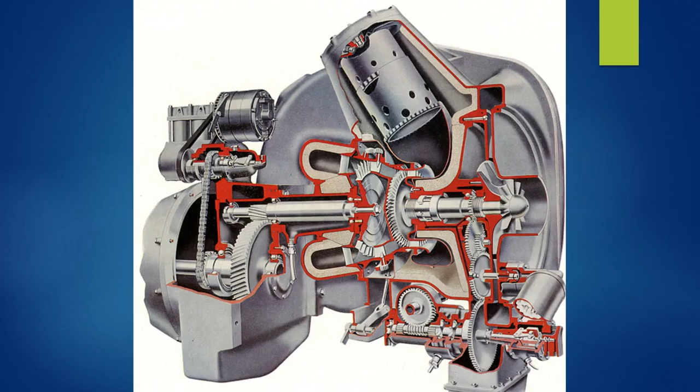Part 3: we never needed petroleum and never will. This is a big subject, sure to raise controversy. We didn't need petroleum in order to have electrified cities and factories, cars, ships, and flying machines. That's why I'm saying we never needed petroleum. I'm not saying we could have been farmers for the rest of our years here on this planet. We could have still had all the things that we have now. That's what I'm going to show.

The number one reason: the abundance of coal. Now I'm not advocating going back to the coal days. What I am explaining is that we never needed to go from coal to petroleum.

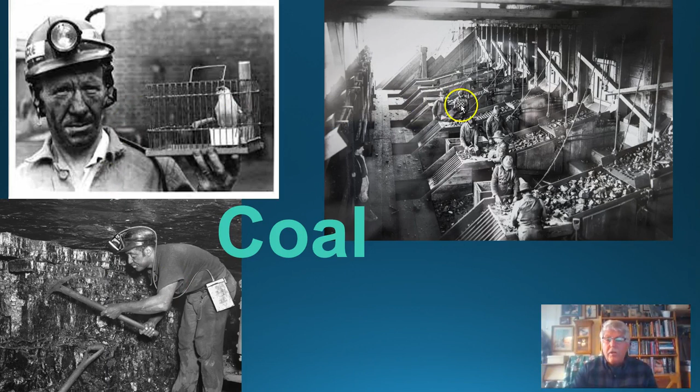These workers put in their time, some real men. I have nothing but respect for these coal miners, and these guys have done their time. I don't want to go back to having this kind of a solution to our current energy dilemma.

What I'm saying is that the process of going from coal to crude oil represented no gain in technology. In fact, removing electricity from our tracks and roads moved us backwards in technology.

Coal is a very plentiful resource on this planet. The one advantage of using coal over petroleum is that you can use it basically as it is, scooped out of the ground. You don't need to process it other than to crush it up a little bit. You don't need to cook it, refine it, put it into different tanks, distill it, or have pipelines. That's why we didn't move forward when we went from coal to petroleum. If anything, we moved backwards.

Look what you can do with coal. You can make synthetic gas out of it, methanol, methyl acetate, and acetic anhydride. And from this you can make virtually every product that we need to manufacture from petroleum or crude oil today.

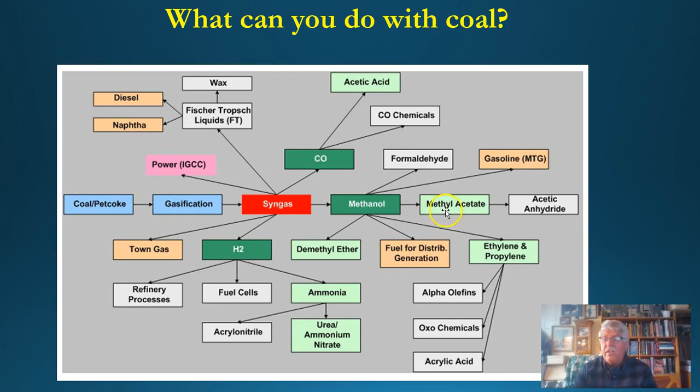We've got diesel and naphtha here. We've got gasoline coming off, first producing methanol and then converting that into gasoline. Boy, what a dumb idea that is, but hey, if you've got to have gasoline, that's one way to make it. But you can make everything from coal.

Now this, from 1910, is a steam generator. We've got a 2-stage steam turbine here and an electric generator here. This was invented as early as around 1884. But folks, understand, the day this was invented was the day it was lights out for crude-produced liquid crude oil, because this ran off steam.

And in order to make steam, all you need to do is boil water. And how do you boil water? With anything that'll burn. This provided a way to get energy anywhere on the planet by using copper wire to get it there, rather than trucking it or using pipelines.

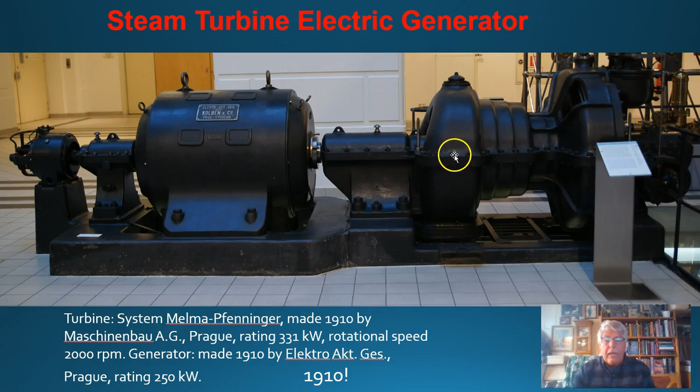Now imagine if today all of our highway system was an electrified grid, like it should be and like it was at one time in major cities in the United States and across Europe. We would be able to stop carrying fuel, stop filling up with fuel, stop polluting the downtown, get rid of service stations. We'd have no more tank farms, no more pipelines. That's a major improvement. That's a win for the environment.

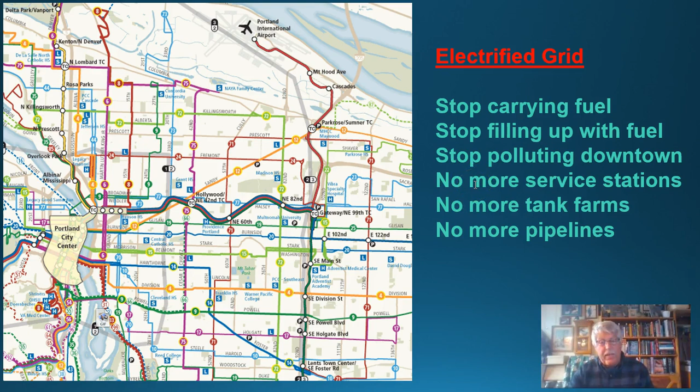Now let's go back even further, beyond coal, to simple biomass energy. Biomass is anything that will burn that's of a mass structure—a solid, like wood. It's the simplest form of agricultural energy use: the direct combustion of cellulosic crops or residues such as hay, straw, or corn fodder.

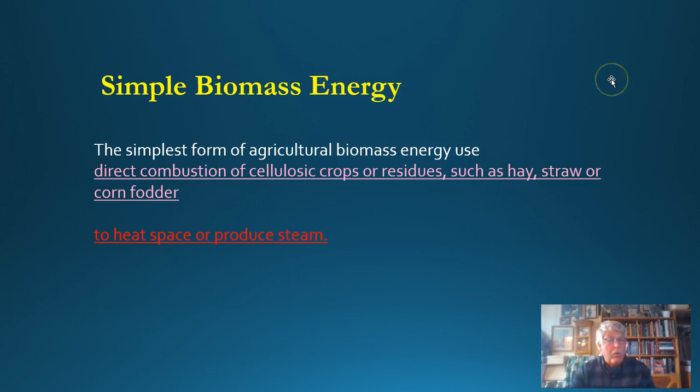And after all, we're just trying to produce steam. So the energy game is over. We've got to stop letting them tell us and make our lives worrisome because we think we're on this little thing, the crude oil curve, and whatever the price of crude oil is, that our prosperity goes up and down.

This is absolutely absurd. They've got the world consumption now up to 96 million barrels a day, and I calculated that out to where this is what they claim the world is using in petroleum: 2.8 million gallons a minute, 6,000 cubic feet a second. Okay, so how much flow is that?

I tried to find a pipeline. You need a 32-foot diameter pipeline at full flow, 24/7. And this is a 21-foot pipeline, the biggest one I could find. So it would be 1.5 times this size, which would be actually 2.2 times the surface area or size, flowing oil, worldwide demand, 24/7.

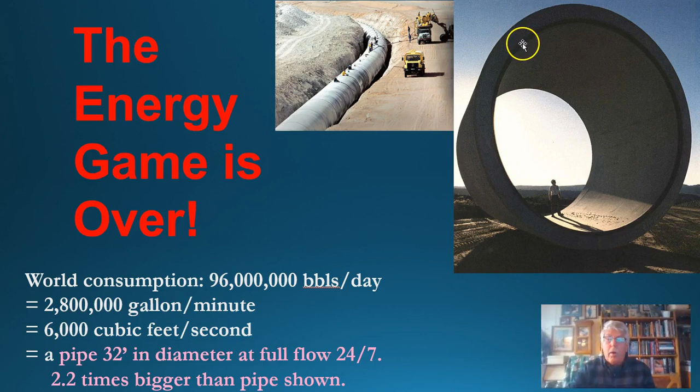This is utterly absurd. You know, they talk about global warming. Here it is, folks. If global warming is real, by the way, let's not go there.

One ton of coal, did you know, equals 188 gallons of oil? In 1912, when the Titanic was sunk, the commercial price of coal was only $1 per ton. So she could cross the ocean on 3,000 tons, and that meant hauling 3,000 passengers, each transported across the Atlantic in total comfort with steam baths and heated rooms and lobster and cappuccino and whatever you wanted. It only cost them $1 per person in energy costs. Now that is a great invention.

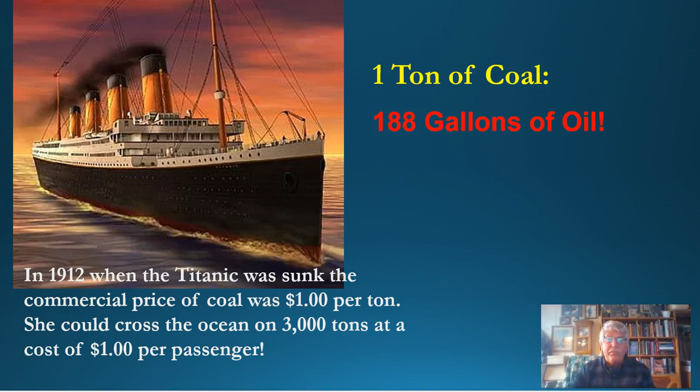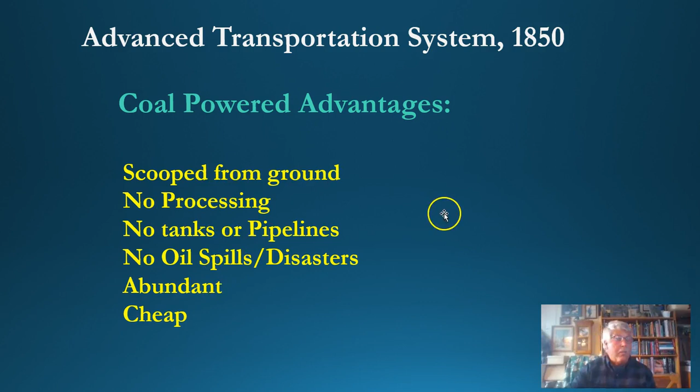The Titanic was a marvel, as were all the steamships, especially for their day. Advanced transportation was actually in effect by 1850. We had advantages using coal, as I mentioned, and it was just scooped from the ground, no processing, no tanks, spills, disasters. It was abundant, very cheap.

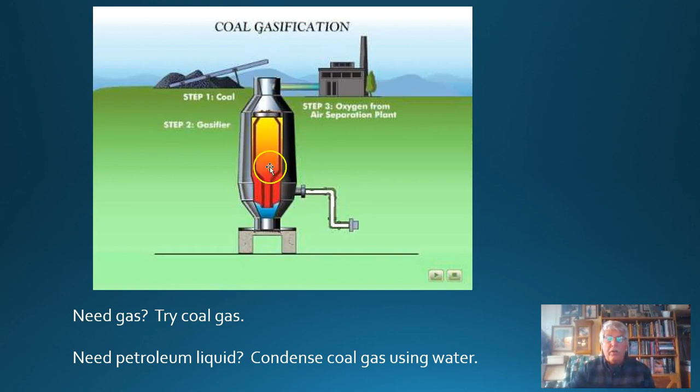And we also had a process you may not have known about called coal gasification. This is where, if you want to convert your coal into a gas or liquid, this is how you do it. It's called pyrolysis: a thermal decomposition of materials at elevated temperatures in an inert atmosphere such as a vacuum gas. It transforms the organic materials into their gaseous components, a solid residue of carbon and ash, and a liquid called pyrolytic oil or bio-oil.

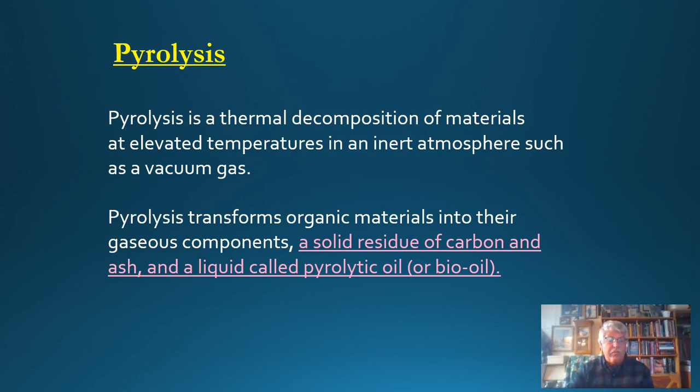So this is just the simple gasification of coal, and we're going to add that into the simple biomass energy equation. We've got cellulosic crops or residues such as hay, straw, corn fodder, that can be converted to a gas or liquid by pyrolysis, just as coal can. Or what's even simpler, you can burn it as is, produce steam that way, or burn it as is to heat buildings and commercial spaces in rural areas.

And it can be utilized for drying crops. Let's say you're making scotch and you need to dry your barley after you've sprouted them, and you're going to need some energy to speed up your drying process. Why not just use the leftover material from last year? Burn it directly. Well, of course, we don't do that because of environmental laws. What we do is just allow them to use petroleum everywhere with leaky tanks and pipes and toxic car exhaust, etc. That's okay, but don't go burning your waste, leftover grass in order to get some energy out of it.

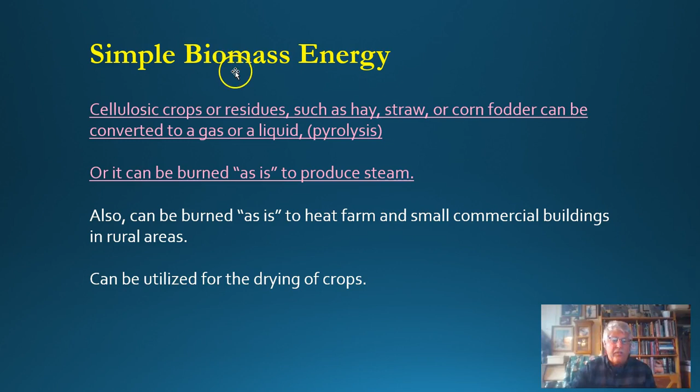So moving on, again, why we never needed petroleum, because we had coal, but not only that, we had coal gas, and coal liquid, and wood waste, and methanol and ethanol from fermentation. We had biomass such as peat, grasses, rice hulls, coconut husks, etc. We had bioliquids like coconut and vegetable oils and animal fats. Believe me, this was plenty to keep our country running, to keep it mechanized. In fact, as you'll see, it'd be even more mechanized if we had just taken advantage of electricity.

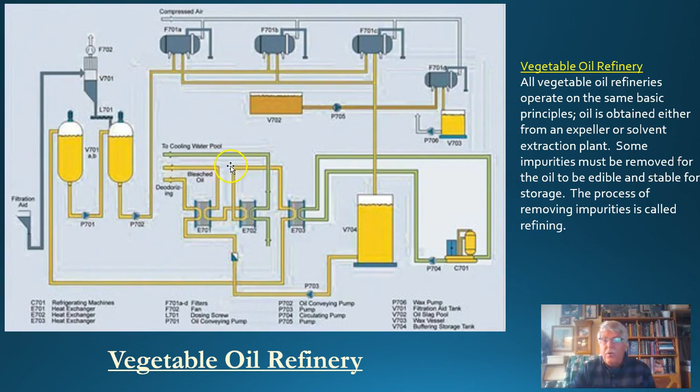Here's a schematic of a vegetable oil refinery. There is such a thing. Oil is obtained either from a solvent extraction or from an expeller, and they put it through a process to remove impurities. And you can also turn these different types of vegetable fats into lubricants. You can turn them into fuels.

And if we look at all the different types of natural oil, such as safflower oil leading all the way down to coconut oil, and look at the fatty acid content, we see that we get just a terrific variety here on this planet.

We can have low saturated, we can have high saturated, depending on mono unsaturated in the yellow or saturated in the green. And then we've got omega-6 and omega-3 in these here. So everything that we need, a tremendous variety, is here already.

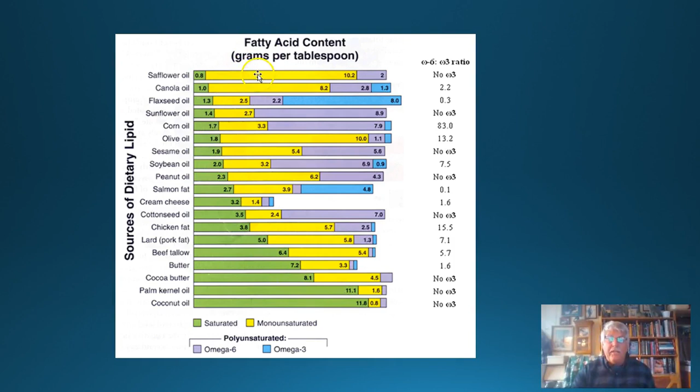Number one is fuel. How are we going to make all this fuel? Well, we talk about coal, we talk about gasification of coal. We could take all of these animal fats and either turn them into a fuel using a biodiesel process, or we can actually use pyrolysis on them as well and convert them into other kinds of liquids.

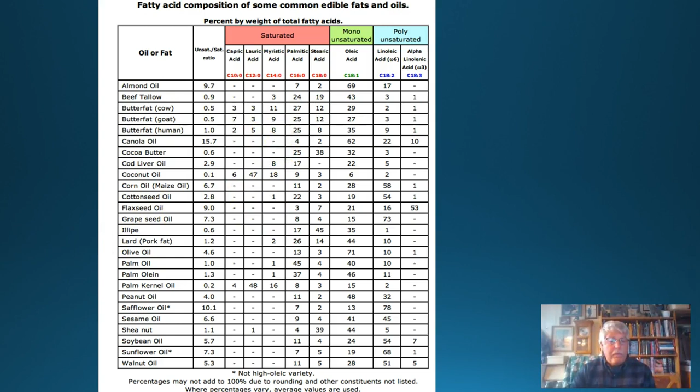So let's move on. We're just getting started here. We can take a look at the comparative analysis of fuel.

The coconut oil that I've got circled here has about the highest megajoules per kilogram of all the oils. And if we look at diesel fuel up here around 45 and gasoline at around 46, you'll notice they are higher in energy content than the oils are.

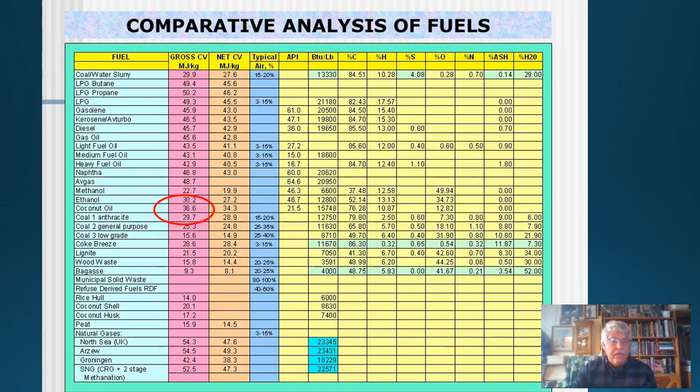But the oils are comparative. The oils will work. I'm not saying they have quite as much energy, but when we turn these into biofuels, they produce nearly the same amount of fuel mileage as the straight petroleum product. So here's just another area to obtain propulsion power.

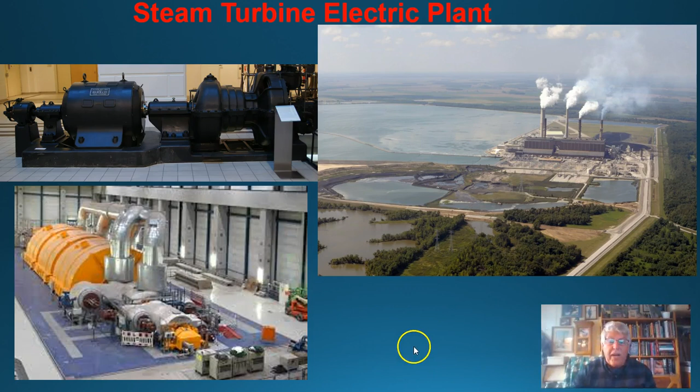So again, here's the small steam plant that I showed you before. In actuality, today, this is what a modern steam plant looks like. This would be a view of the inside of it, the steam turbines here. This is currently the state-of-the-art way to power the planet. You burn something, you produce steam, you run the very efficient steam operation, you convert it into electricity.

So let's see, what could we have done with electricity? In 1879, we had the world's first electric train. I realize this isn't huge, but look at all the people that it's moving around. This is 1879, moving people pollution-free.

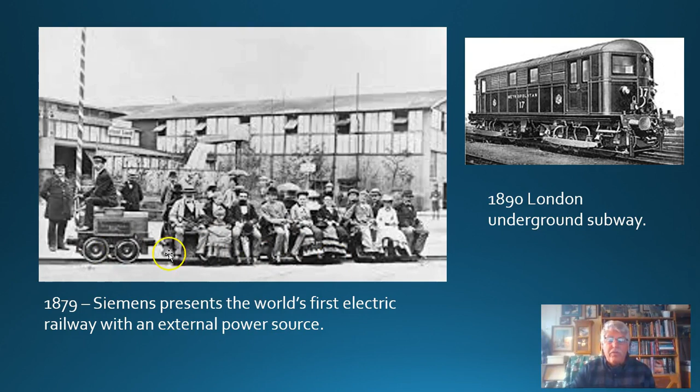And I might add that, using electric technology, that's way above mechanical piston technology, believe me. In 1890, we're looking at a London Underground subway here. In 1906, electric locomotives for the first time in New York Central Railway, and each axle directly driven. There's an armature mounted on each axle.

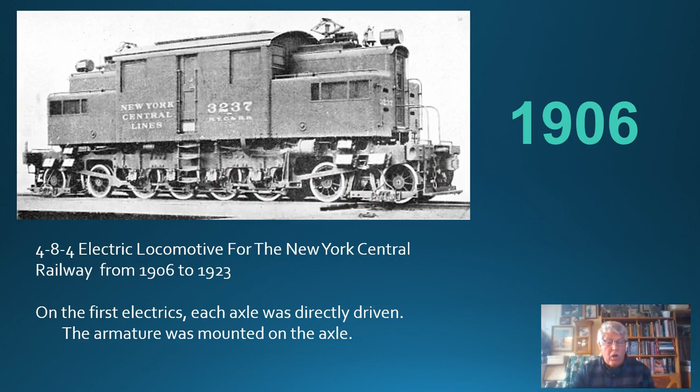Moving along to 1913, now we've got a 2,400 volt electric locomotive, and it went into operation on the Butte, Anaconda, and Pacific Railway in 1913. So this was like the first commercial electric freight train.

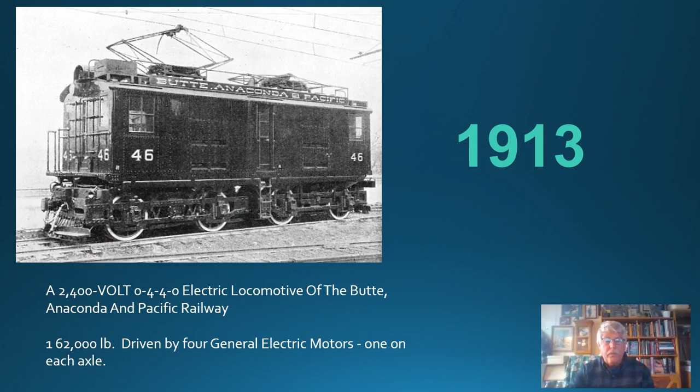What else did we have? We had all these electric vehicles. Baker, Studebaker, Hoffman. Did you ever hear about these? No, because they're the best kept secret.

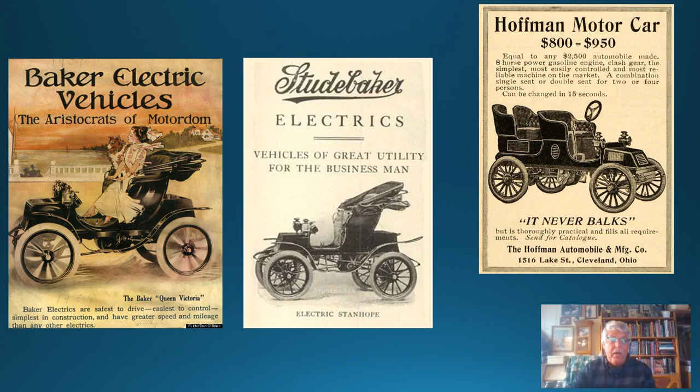But these were all in the years from 1896 up to about 1920. We had a huge number of electric car manufacturers, and they were quality built, and they especially appealed to the rich because they were so reliable.

Just a thought. That's what we're here for, is to share thoughts.

These oil companies didn't play fair. They bought out all the carriage manufacturers. They converted them to car manufacturers. They created a carriage shortage. They drove the price of carriages up above the cost of automobiles. There was such a shortage. That's what happened to the carriage. These guys were determined to get our horses off the street so we could have stinky cars down there in City Central, giving everybody carbon monoxide poisoning on the first and second levels of the city.

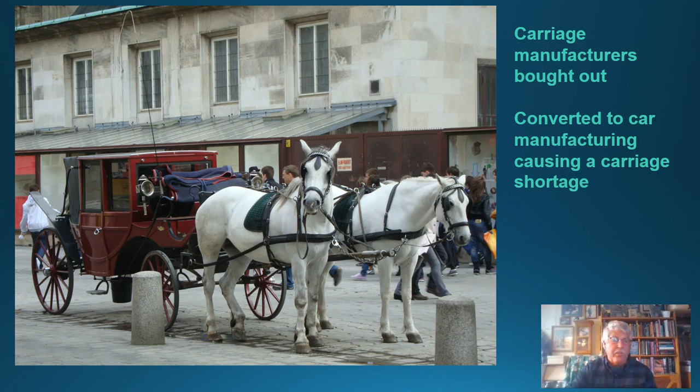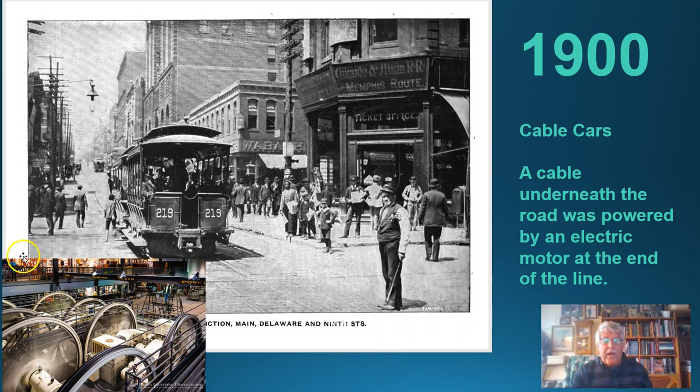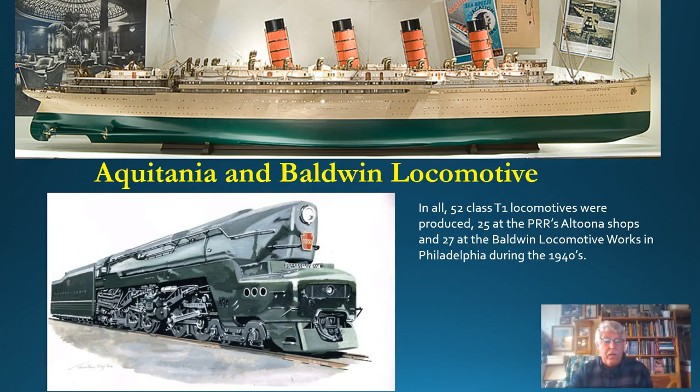This railroad was reputed to be able to go 150 miles per hour. This was in 1940, running on coal. Let's look at some other inventions.

We had the Hindenburg, which was diesel powered. If it's diesel powered, you can run it on any of those vegetable oils we were talking about earlier. So she could have run on vegetable oil, tallow, lard, alcohol, or a combination. Or, if worst comes to worst, throw some petroleum in there, but use that as a last resort.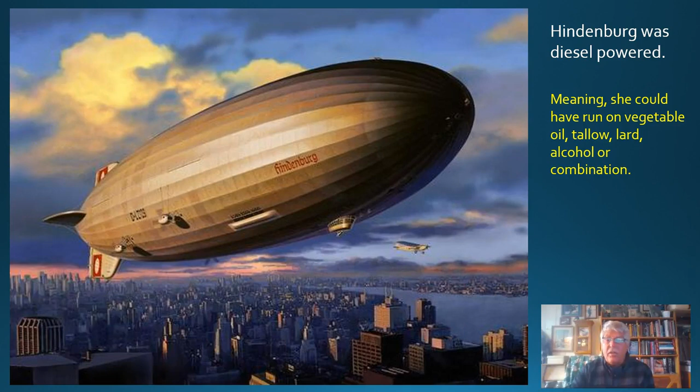Overland Limited in 1906 was a coal train that went from Chicago to San Francisco. It ran on coal, had a dining car, a cabin, a reading lounge, showers, and it took about 60 hours.

Okay, yeah, that's a little slower than flying by air today, but it's such a better ride, and you're so much safer, and you don't have to go through the agony of an airport, leaving the ground and landing at 100 knots in a crosswind and things like this. And this thing is running off coal at $1 a ton, which is like 188 gallons of oil per dollar.

So, I mean, these things were brilliant. They were just energy brilliant. There's nothing that could compete with coal. So the only thing they could do is get rid of the coal burners.

Now, let's say you took a coal train to San Francisco and you got there, and we weren't using petroleum. So you might have to move around on a horse and carriage. Like I said before, that wouldn't be such a bad ride, would it? Just as fast. But even in 1900, you could also have had an electric vehicle.

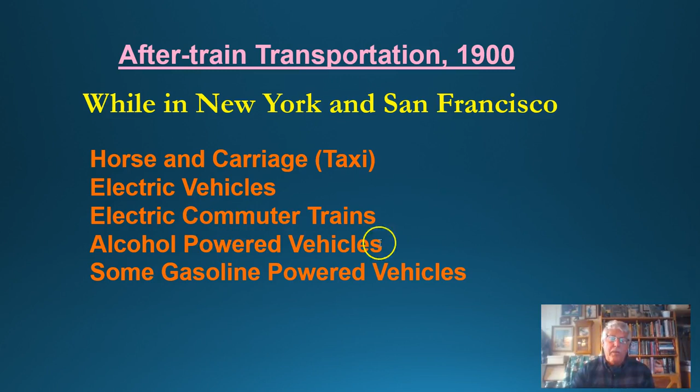You could have used the electric commuter train. You could have used alcohol-powered vehicles. And there were some gasoline-powered vehicles. You could have gone into San Francisco and ridden around in a white steam car, which could run off any liquid fuel.

Or in 1908, when the Model T came out, it was set up to run on alcohol. By the way, alcohol smells really sweet, compared to gasoline in a downtown area there is no comparison. They should have cleaned up gasoline, they should have never let us burn gasoline in the downtown area.

Okay, so here's a simple still. I remind you, with a device like this you can make your own fuel, and in fact they were doing that. And as long as they were doing that, we were getting a much cleaner burning fuel in the downtown sector, and they were using up a lot of their old material.

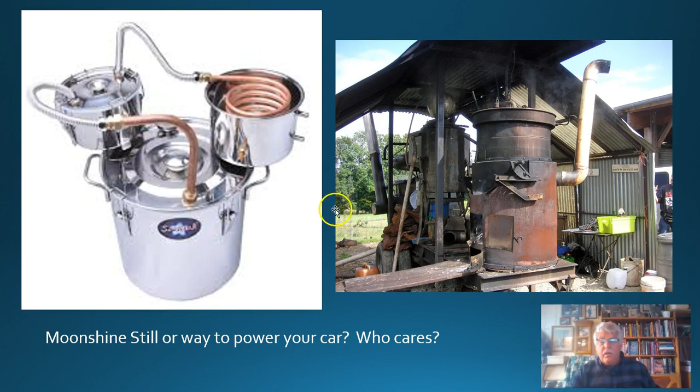They could use the old straw to burn and make heat. They could use the old crops, just about any part of the crop itself, to ferment and get alcohol out of. Everybody should learn how to run a still. It's so simple, and it's such a valuable skill to have.

Doesn't take that much equipment, and what you get is, frankly, something you can run a hospital off of. I know alcohol has nothing but a bad rep, but on the other hand, you could run your car off it, and you could drink it. I mean, come on, this is just a miracle product, and we don't use it except to abuse it.

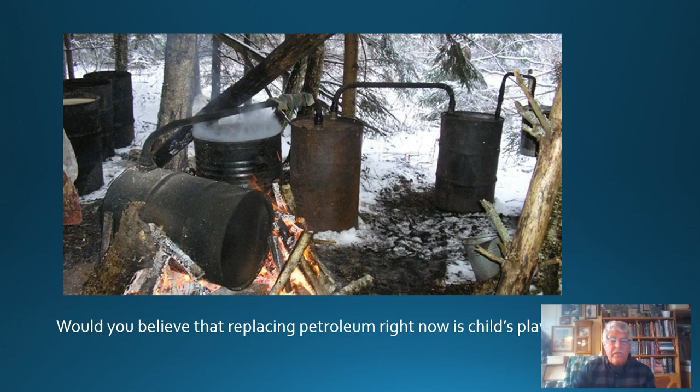Really. Now here's some more stills. Alcohol production, as you can see, is much safer than refining petroleum. A heck of a lot more fun, too.

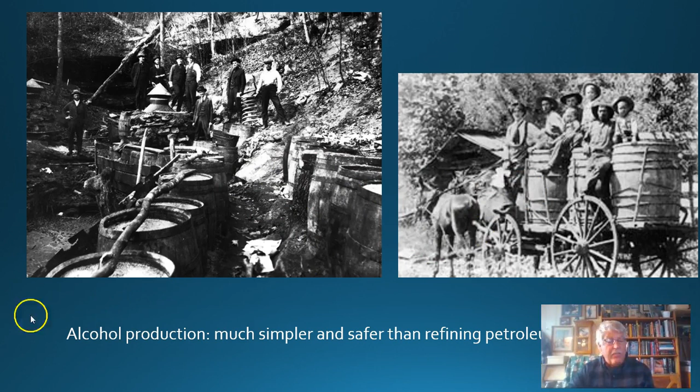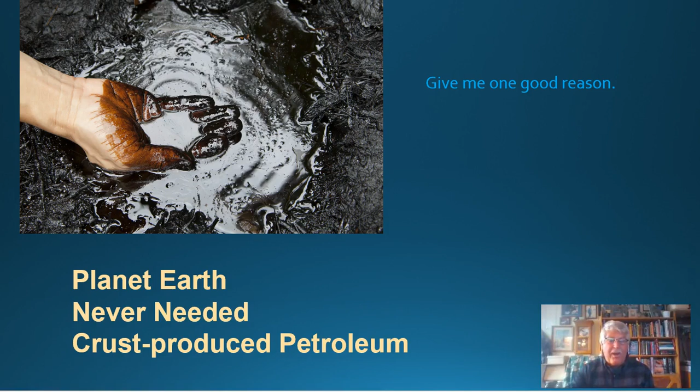So planet Earth never needed crust-produced petroleum. Somebody give me one good reason in the comment section. I know I'm going to piss a lot of people off. Think it over, folks. What have they done to us?

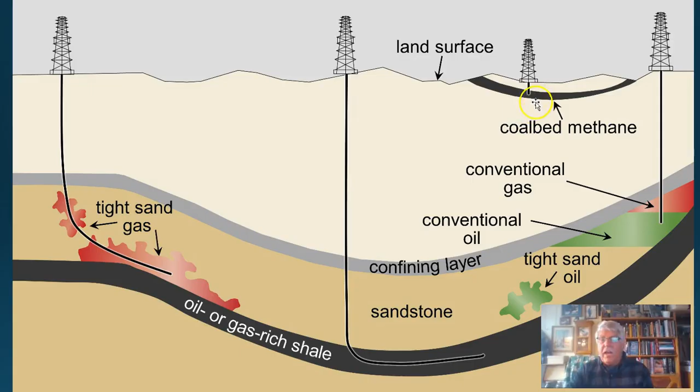We can produce all the oil we want above ground. By the way, hemp is one of the most intensive oil-producing crops. You've probably heard that George Washington insisted farmers use a certain amount of their land for growing hemp when he was president. And they have the gall, the industry has the gall to say that petroleum is a non-renewable resource.

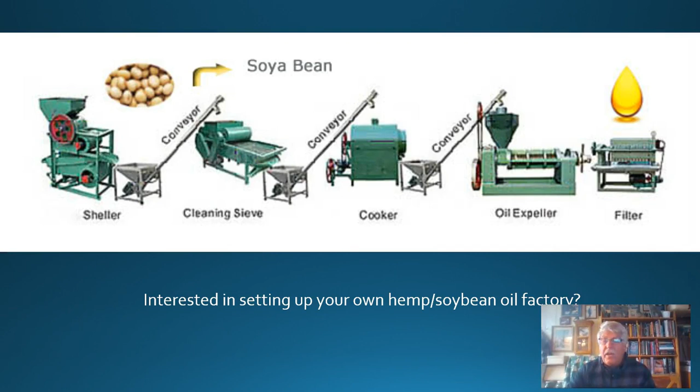So what do you mean petroleum is a non-renewable resource? You mean the toxic crud that comes out of the ground, that you might run out of that someday. That's not true either, though.

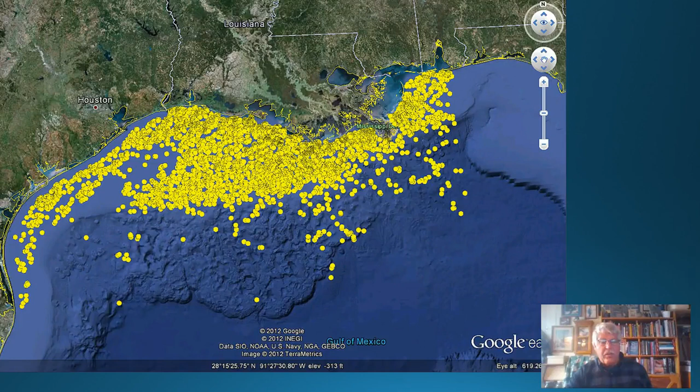Well, we're sorry, they say. Yeah, we're sorry. We're sorry. We've burned all this up in the atmosphere, they say. And by the way, you know, we've all been paying an extra $600 premium on our cars so that we've got catalytic converters so that we do our share in maintaining a clean atmosphere.

And this is how we get treated, where they don't even have to have a blowout preventer, and then they turn around and they're allowed to burn this off. It's just straight into the atmosphere. This undid all of our smog laws. It made them all pointless and worthless and nothing but a scam.

They pollute so bad when you burn them, it is unreal. I've actually been to a tire burning plant, and it was disgusting how much cleanup it had to have just to produce 25 megawatts. So the peak oil statement is a farce. The fact is everything that the sun grows is a hydrocarbon, and running out of hydrocarbons is one of the biggest frauds of all time.

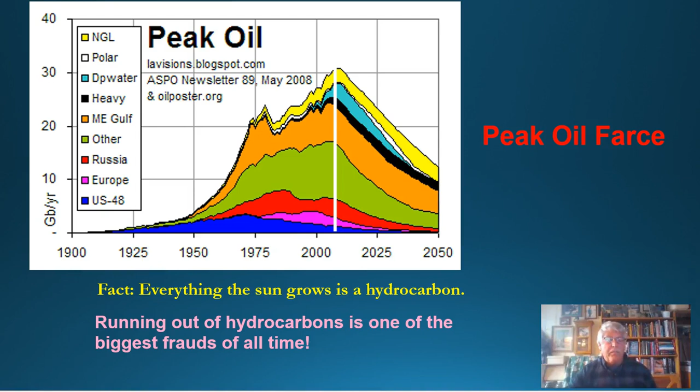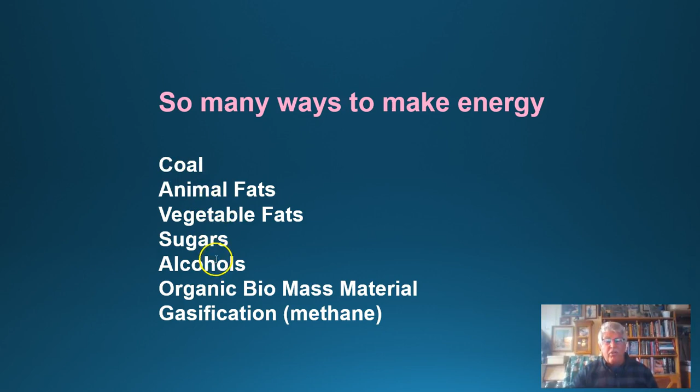But they're still pushing it. They're still teaching our kids in school that oil comes from dinosaurs that passed away. I'm not kidding. They're still teaching that. There's so many ways to make energy. Coal, animal fats, vegetable fats, sugars, alcohols, organic biomass material, gasification. So here it is. And these sources of energy, they say, oh, non-renewable.

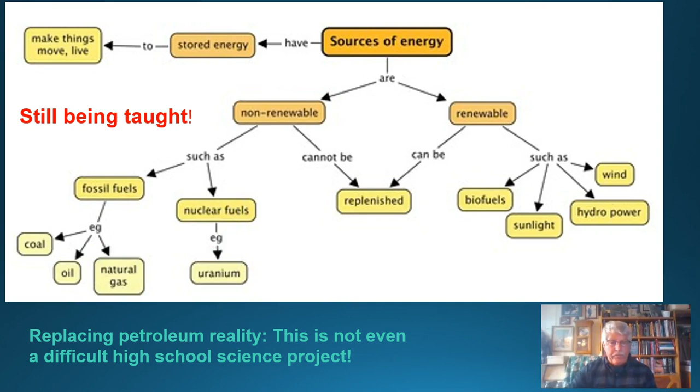We've got fossil fuels over here - coal, oil, natural gas. So we're supposed to be worried about this thing they call peak oil. Can we replace petroleum lubricants?

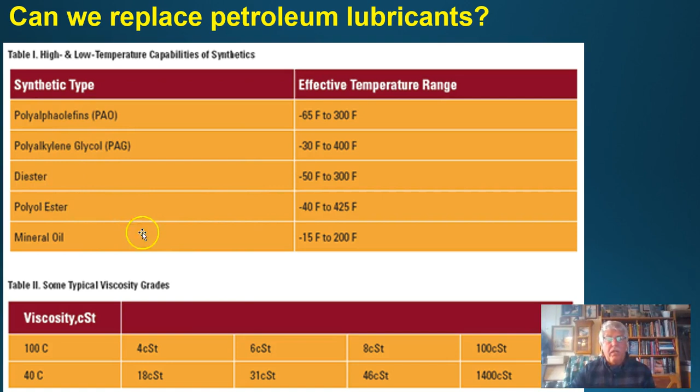Done deal. They've been doing this for 6 or 7 decades, making lubricants out of polyalpha olefins, polyalkylene glycols, diesters, polyol esters. So mineral oil is just one of many types of lubricant.

Where are we at today? That's another reason why I'm bringing this up. We're still on this flawed teaching.

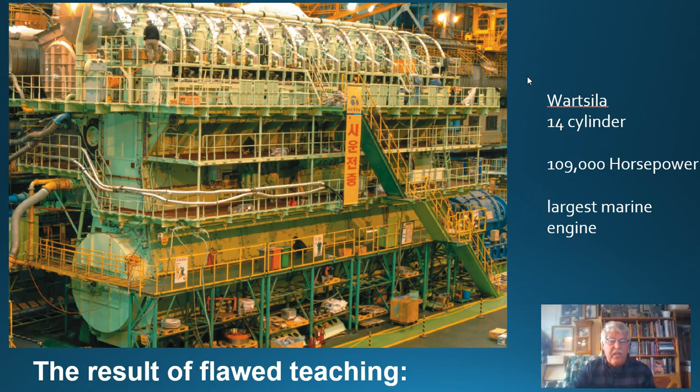Here is a state-of-the-art industrial marine engine. It's a Wärtsilä 14-cylinder that produces 109,000 horsepower. This is the engine in the largest container ship on the planet, known as the Maersk, has one of these engines in it. We're talking pistons that are 6 feet in diameter with a 10-foot stroke, pistons that have to stop, turn directions, and go the other way. We're still using this kind of intensely frictional engineering mechanism.

It is just insane. Well, okay, they're going to tell you we've really fixed this thing up, made it state of the art, because it has an exhaust gas economizer that generates steam for a turbine-driven generator, and the turbine generator also includes an exhaust gas power turbine driven by a portion of the exhaust gases. So this is obviously something we should have been putting on every piston engine from day one.

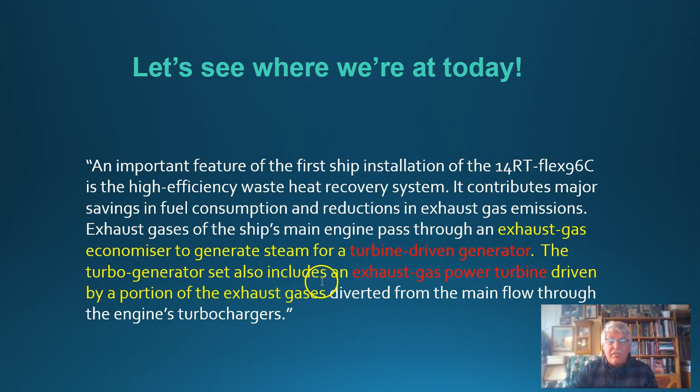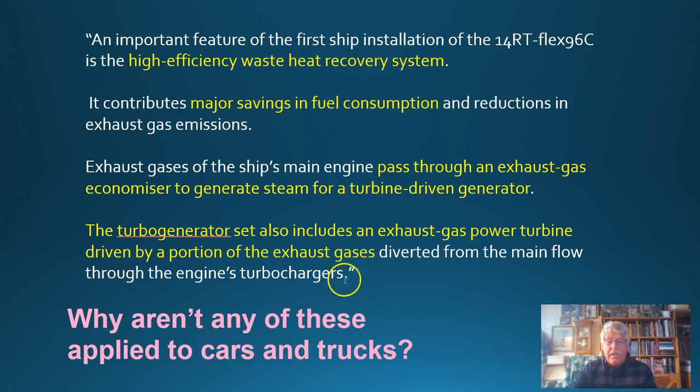Certainly we should be reclaiming as much exhaust gas temperature as we can on all of our piston engines. They all dump exhaust gas straight into the environment. We lose all of that energy. And so this manufacturer is able to tout that this engine is such a high efficiency engine because they've done all these things to it. Why aren't any of these applied to our cars and trucks?

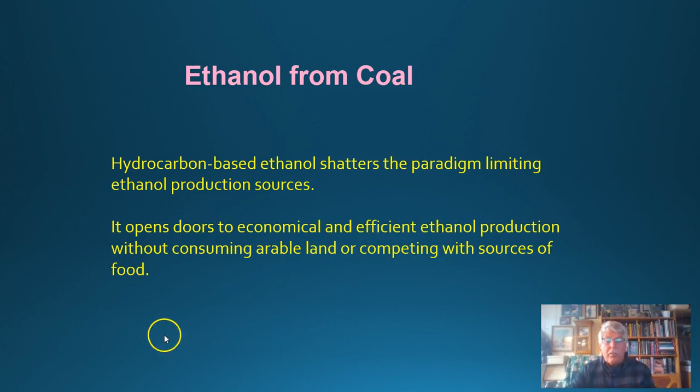Well, we've also got ethanol from coal. We've got hydrocarbon-based ethanol that shatters the paradigm, limiting ethanol production sources. It opens the doors to economical and efficient ethanol production without consuming arable land and competing with sources of food. We can make ethanol from natural gas. In the meantime, this is what we do with most of our natural gas - in the United States, we allow them to flare it.

We're still using gasoline. It's irritating to eyes and skin, causes dizziness, drunkenness, unconsciousness, absorbed through skin. Chronic exposure causes dermatitis, possible cancer hazard. It's flammable, can form explosive mixtures in the air. It's toxic, it burns poorly. Carbon monoxide is one of the most poisonous gases on the planet, and gasoline produces that. It requires low compression engines so they don't pre-ignite, detonate, make that funny noise, and low compression always means poor fuel consumption.

If we can make alcohol from hydrocarbons, we can make alcohol from organic fats - we don't even need to ferment it. That's another route we can go. We can also do catalytic cracking at the oil refinery. We can also reclaim plastic by pyrolysis.

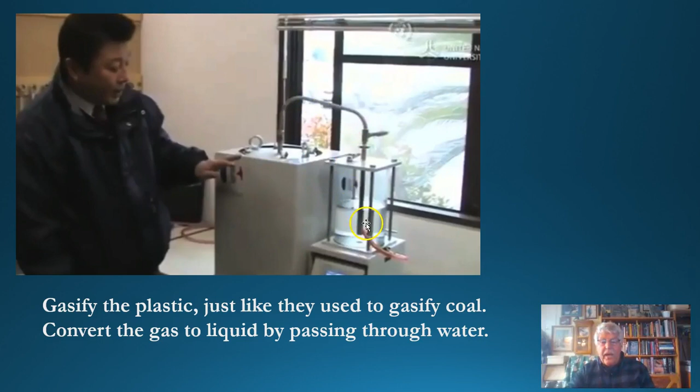Here's the inventor showing the whole process. He's stuffing this thing with plastic bags and Coke bottles and everything else, and he's producing a gas, and this is turning into a liquid. That's the whole unit right there. You turn it into a liquid that you can burn in your engine. It's that simple. This is what it looks like at the industrial level.

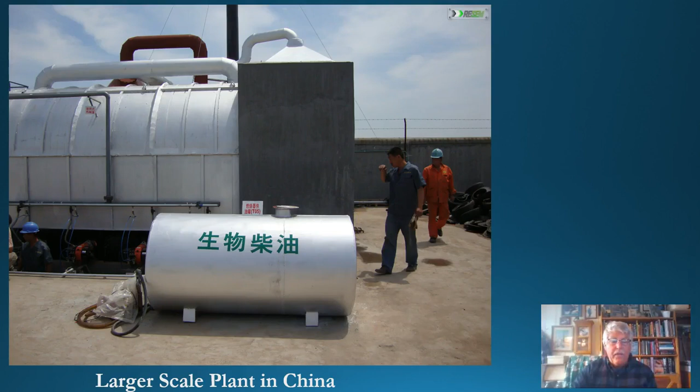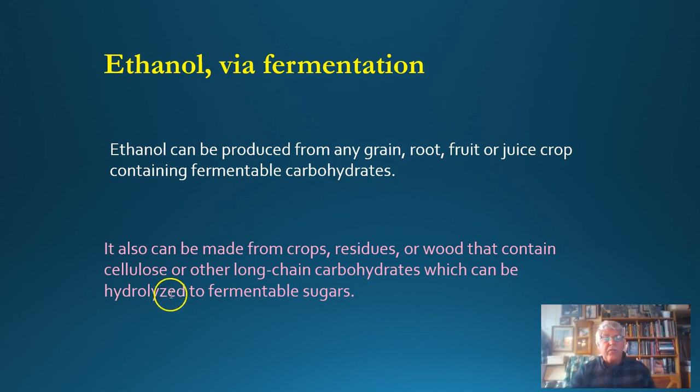Fats can be converted to alcohol in the same manner that hydrocarbons are converted to alcohol. Now, ethanol via fermentation is very efficient, and it can also use residues or wood that contain cellulose or other long-chain carbohydrates, which can be hydrolyzed to fermentable sugars.

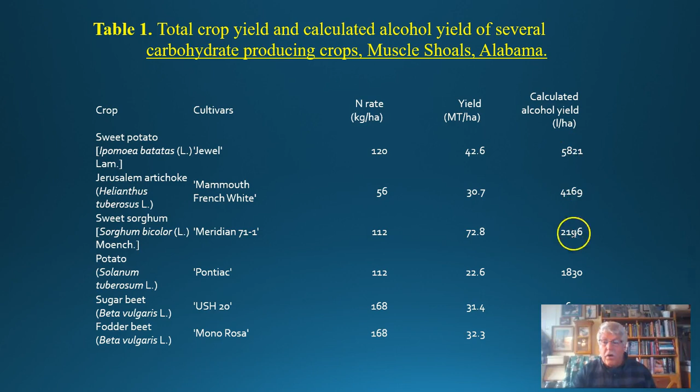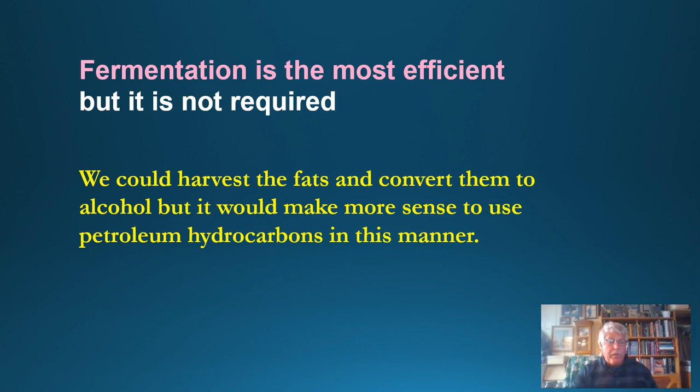Lots of ways to produce oil here on this planet. Fermentation is the most efficient, but it's not required. We could harvest fats and convert them to alcohol, but it would make more sense to use petroleum hydrocarbons, probably in this manner. We have methanol from natural gas.

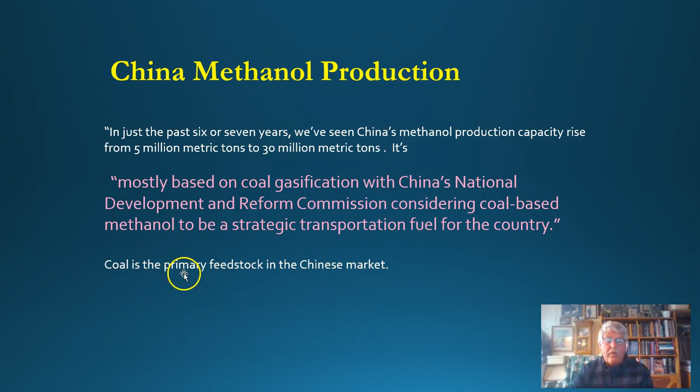This is not alcohol for drinking, remember? China's methanol production capacity rose from 5 million metric tons to 30 million metric tons in just the past 6 or 7 years, and it's mostly based on coal gasification. Coal is the primary feedstock in the Chinese market.

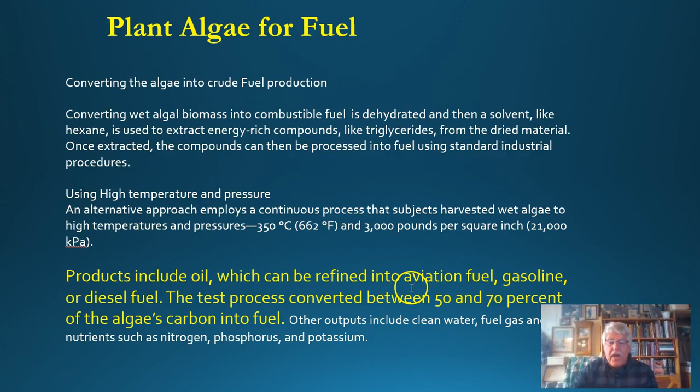During the Carter administration, they did a lot of research on making fuels from algae. We convert the wet biomass into a combustible fuel by dehydrating it, then use a solvent to extract the rich components like triglycerides from the dried material. Once extracted, the compounds are processed into fuel using standard industrial procedures. Products include oil, which can be refined into aviation fuel, gasoline, or diesel fuel.

From the National Renewable Energy Laboratory, the Aquatic Species Program focused on the production of biodiesel from high lipid content algae growing in outdoor ponds, using CO2 from coal-fired power plants to increase the rate of algae growth and reduce carbon emissions.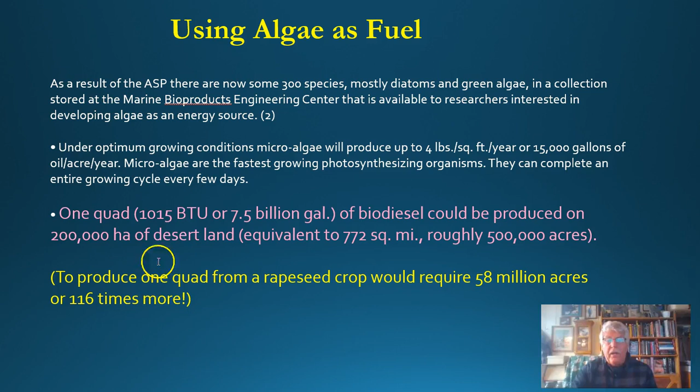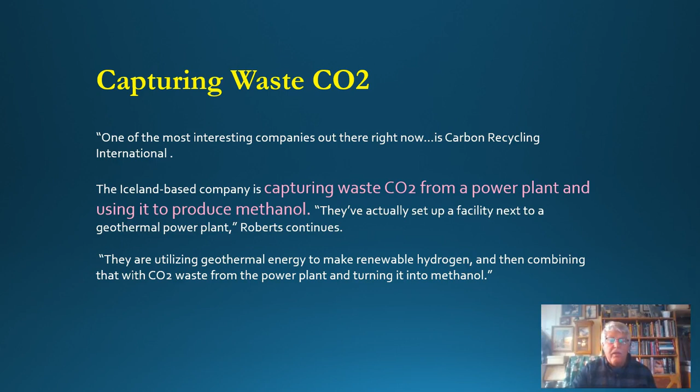So why are we still using crust-produced toxic petroleum? When the gasoline piston engine was invented in 1885, it's now remained in service 133 years. There's only one reason: because of increased consumption of petroleum. It's a stupid design, designed to have lots of friction, lots of maintenance, and always consume way more petroleum than any other kind of transportation device that has been designed.

So my suggestion: stop buying their stupid designs till they give us good ones. That just means hang on to your existing car. Stop buying piston engines that only run on a toxic fuel. Demand a non-piston powered vehicle. We've had them, they worked great. We had the turbine, we had the Wankel, we had the electric, we've even had the fuel cell. So there's no excuse. It's time for a change.